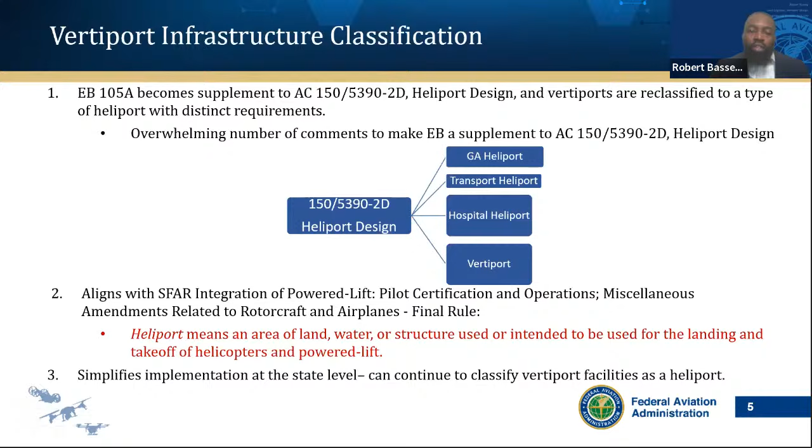So with that, we'll open it up for questions on this particular topic. All right, thank you very much, Robert. While we're collecting our questions in the Q&A to read, I'll go ahead and just get started and throw some common questions out there.

Will future guidance further clarify the differences between a vertiport, vertipad, and vertistop?

That's a great question. Future guidance will indeed delineate the difference between vertiports, vertipads, and vertistops. As a forecast, you can think of a vertiport essentially as that comprehensive full-scale facility that is designed to accommodate multiple VTOL aircraft, providing not only a takeoff and landing area, but other facilities for refueling, recharging, maintenance, passenger handling, and other accompaniments. You can think of a vertipad instead as a smaller, simplified facility that is designed specifically for VTOL aircraft to land and take off.

Essentially, it's a landing pad, a platform. It has minimal infrastructure without the same support services or features as you may see on a vertiport. A vertistop, on the other hand, is the smallest and most basic of these facilities for VTOL aircraft. It's essentially a landing and takeoff point without any major infrastructure or services. And they're really designed for short-term or emergency operations and typically serve as intermediate stops on a longer flight route. Once again, future guidance will specifically delineate these items more clearly.

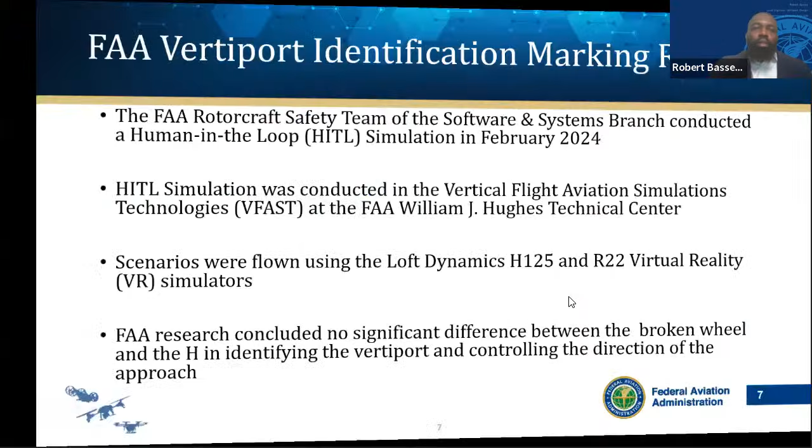So in terms of the identification marking used to delineate or to help identify or draw the attention of a pilot to a vertiport, there was some research that was done subsequent to the publication of Engineering Brief 105 in September of 2022. As most of you are familiar with, as part of that engineering brief publication, we introduced the idea of a broken wheel symbol as the identification marking for a vertiport. At about the same time, our counterparts in EASA introduced the V symbol as the identification marking for a vertiport. And in technical interchange conversations with EASA, we made a determination that the FAA would take on a research effort to investigate the effectiveness of different vertiport identification symbology.

We would look at the broken wheel symbol juxtaposed against the EASA V symbol, and then juxtaposed against the heliport H identification marking. And the goal of this study was to obtain pilot feedback regarding the varied vertiport symbology, and the results of that study were to inform the update to Engineering Brief 105 for vertiport design. So pursuant to that, we, the FAA, working with our rotorcraft safety team at Atlantic City, New Jersey, conducted a human-in-the-loop simulation in early 2024. That simulation was conducted in the Vertical Flight Aviation Simulations Technologies (VFAST) Lab at the William J. Hughes Technical Center. We had pilots that flew approaches instead of assessing the symbology via replays. That's an important point. These approaches were actually flown by pilots and were not viewed or assessed via replays of the symbologies.

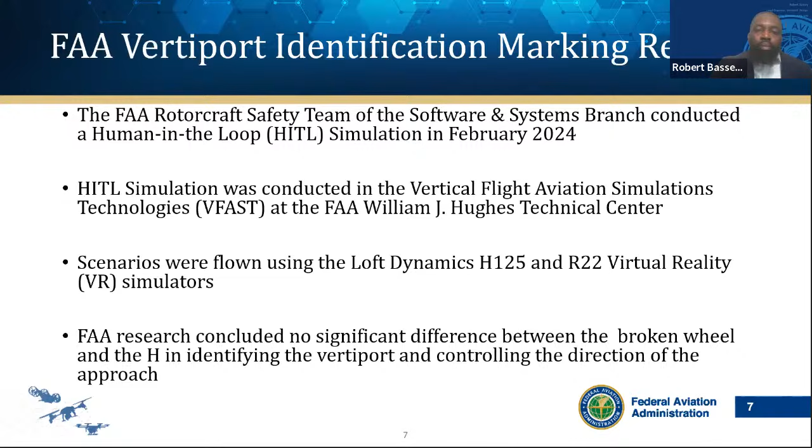And so this familiarity was largely based on their prior knowledge of the H symbol. So given the findings of the study and congruence with our decision already talked through, to now classify vertiports as a type of heliport, the vertiport identification marking was updated to the H symbol to align with other classes of heliport infrastructure. Now, vertiports are still distinguished, even under this framework, from other types of heliports, with the addition of a VTL marking on the TLOF as part of the identification system for the facility.

The application of the VTL marking really followed the precedent of the PVT marking on a heliport, which is used to indicate that a heliport is privately owned or intended for private use only. Similar to the PVT marking, the VTL marking is to be placed in a prominent location on the TLOF and painted in large bold letters on the vertiport surface in order to be clearly visible to pilots approaching the vertiport.

This change also simplifies the conversion of a general aviation heliport to a vertiport, as they largely share a similar marking and identification system, except, of course, for the VTL marking. This also simplifies the charting of vertiports on aviation maps so that pilots can identify them as suitable locations for landing and taking off for appropriate type of aircraft, with the key charting information for vertiports now more in alignment with that for heliports.

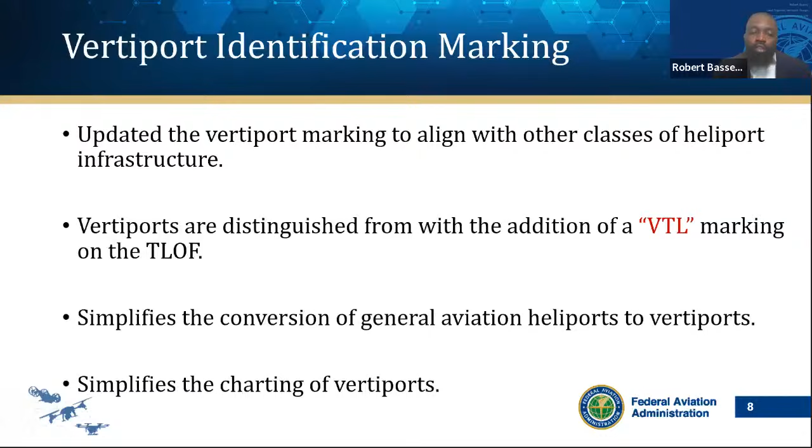So with that, we'll open it up for questions. Excellent. All right, looks like we have a question.

Will there be any guidance regarding parking stands and their markings? We don't have any guidance regarding markings on parking stands currently in Engineering Brief 105 Alpha. We expect to provide guidance on parking stand markings as we think about the next update to the engineering brief, or our performance-based advisory circular, which we're going to go over in greater detail later on this afternoon.

All right. Again, some common questions on this topic. Does the FAA plan to create a unique identification marking for hospital vertiports? A lot of interest in hospital vertiports. Okay, we plan to have an alternative identification marking for hospital vertiports, once again, to bring things in alignment with our heliport design criteria. And this is to help ensure that, similar to hospital heliports, hospital vertiports are easily recognized for their critical role in EMS and distinguished from other GA or non-medical heliports.

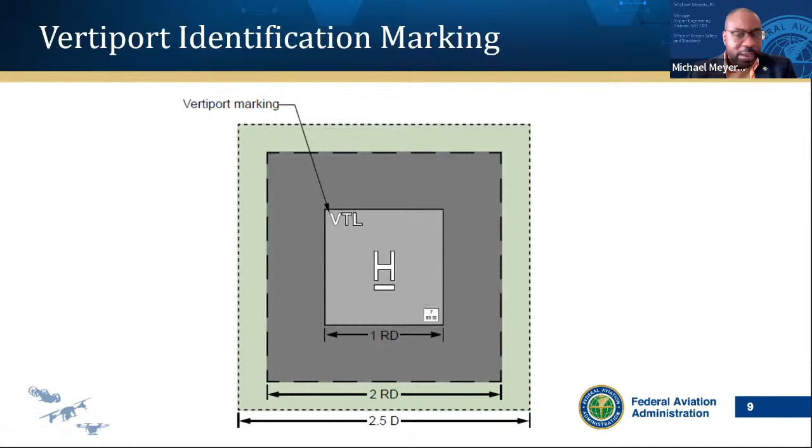All right, perfect. All right, looks like we will go ahead and move on to the next topic, and that is landing area geometry.

All right, over to you. Sorry, go ahead, Mike. No, I said over to you.

Okay, thank you, Mike. Okay, so this one will be fairly straightforward. In terms of landing area geometry, we made one significant change in the engineering brief, which is with respect to how we think about the rotor diameter of the aircraft versus the controlling dimension of the aircraft. So for the uninitiated, the controlling dimension is essentially that primary dimension that defines the overall size of the aircraft. Think about its length, its width, its wingspan, and it typically encloses the entire VTOL aircraft projection.

That controlling dimension often determines the aircraft's footprint. It determines its clearance requirements and its general design constraints. The rotor diameter, on the other hand, refers to the diameter of the rotors or fans that provide that vertical lift during takeoff and landing. Or more on the nose, in terms of these new aircraft configurations, it's the diameter of the smaller circle enclosing

just the propulsion units. So in Engineering Brief 105A, the rotor diameter is being used for the TLOF and FATO sizing, and the controlling dimension is being used in nearly all other instances. This change, we feel, aligns with, once again, the overarching theme of today's webinar, the alignment with heliport design guidance. This change, we feel, aligns with heliport design guidance.

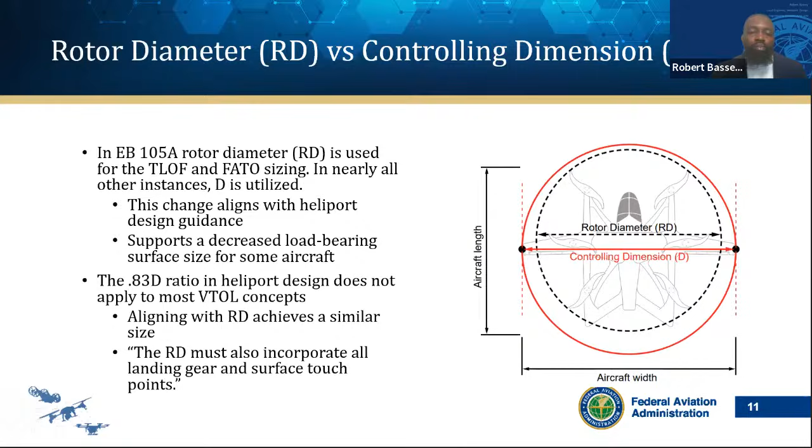You also have the tilt rotor design, where the rotors or the wings tilt from vertical takeoff mode to horizontal flight mode. And then the all too popular lift and cruise design, where you have separate lift and cruise propulsion systems, where vertical lift is provided by separate rotors or fans and horizontal thrust is provided by wings or additional propellers. In all these designs, the rotor diameter can vary significantly.

That's the key point. And in some cases, the rotor diameter may be smaller than the controlling dimension or wingspan of the aircraft. And that is largely what has driven this change, because it addresses the gamut and the variation in design features across the aircraft within the industry. Next slide. And we'll open up for questions.

All right, thank you again, Robert. All right, let's see, I have a list of a few questions here.

When does the FAA expect that DCAs, that being downwash caution areas, will be published? So that doesn't directly relate to this topic, but we can speak to that here. So we expect that the DCAs will be published as we conduct further operational testing throughout this calendar year, which will culminate in a technical report at the end of this calendar year. And as such, the DCAs will be published over the course of this year as that operational testing on downwash, outwash for varied vertical lift aircraft is completed.

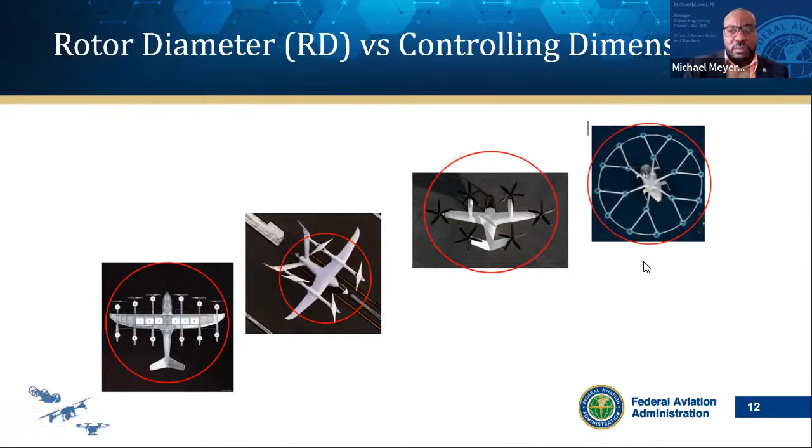So what I'll do is I'll kick off the discussion with a couple of slides, and I'll hand it over to Mitch to speak from his perspective. Right. So from our standpoint, we've been grappling with this issue of landing accuracy for these VTOL aircraft, and how that relates to the sizing of the critical surfaces at a vertiport.

So after much discussion amongst our lines of business, we have agreed to work collaboratively to develop performance-based standards for landing accuracy, in terms of landing accuracy targets that VTOL aircraft would have the option of demonstrating performance to as part of their type certification process that they're working through with Aircraft Cert.

So landing accuracy targets for these aircraft are really crucial in our estimation in order to ensure that these aircraft are safe and efficient and precise, particularly as these aircraft are designed to operate in urban environments or really small constrained landing zones. So given the diverse designs, which we've already covered earlier this afternoon, and the intended diverse use cases, there is a desire that the aircraft manufacturers and other stakeholders have shared with us to utilize existing heliport infrastructure and relatively small platforms such as rooftops.

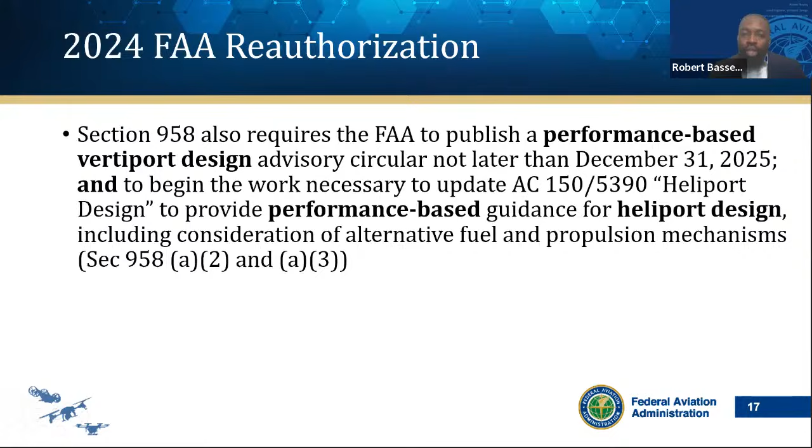This provision or this stipulation within the reauthorization, we can really consider that one task, right? The legislation clearly indicates, especially the third part of the legislation, the need for these standards to be informed by aircraft performance, and ultimately points to the unification of the guidance and the addressing of dual-use facilities, both new and existing.

So with that in mind, the FAA made a decision to pivot away from maintaining separate standards for both vertiports and heliports, and instead pivots to the development of a core set of unified performance-based standards that encompass both heliport and vertiport design, supplemented by specific requirements for different types of aircraft. The timeline to develop this unified vertical lift advisory circular that will be inclusive, once again, of standards for heliport and vertiport design is by June 30th of 2027.

Part of what drove the decision is responsiveness, frankly, to industry comments and feedback, right? A unified vertical lift infrastructure guidance document, as I've heard personally myself at conferences and different industry focus groups and the like, is something that the industry has been advocating for a while. There's been a lot of momentum building internally and externally for it, frankly.

An industry consensus, as has been shared with us, has been that this streamlined regulation could potentially reduce development times, reduce costs for both vertiports and heliports, and allow for existing infrastructure to be more easily adapted for both conventional helicopters and powered lift aircraft.

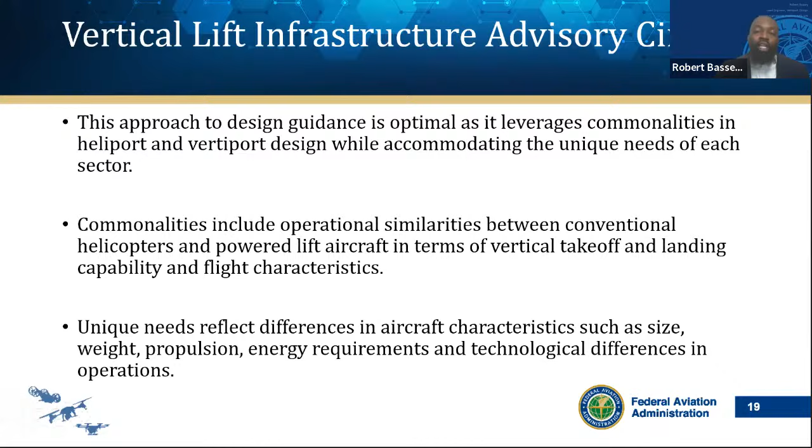Another important delineation as we think about this is noise, right? Noise abatement is important for both these types of aircraft, but the degree of noise mitigation that's required for VTOLs could differ significantly from conventional helicopters, and that's something that we are assessing within airports and assessing within the agency as a whole.

So overall, to support the development of a comprehensive unified vertical lift infrastructure advisory circular, additional research is required, right? Because we need to garner additional performance data for all vertical lift aircraft. So this includes VTOL aircraft and helicopters alike, right?

And specifically to feed the development of the first iteration of this advisory circular, we will need to collect performance data around the downwash and outwash of both types of aircraft, your landing precision, which will be a follow-on of what we've done already engaging with VTOL aircraft OEMs. We will need to do some testing on autonomy, and as I mentioned earlier, testing on ground maneuvering.

The data that we collect will then be used by our FAA research team to fill in aircraft information gaps. And this will require also continued coordination within the FAA across various lines of business, as well as external collaboration with manufacturers, VTOL aircraft manufacturers, helicopter OEMs, and other stakeholders.